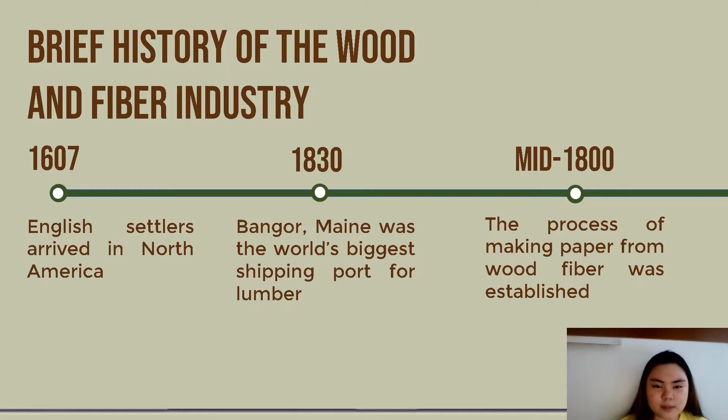In the mid-1800s, the process of making paper from wood fiber was established. Before then, paper was produced from rags and other materials. And since then, the wood industry only grew larger.

Nowadays, the industry makes up about 4% of the world's economy. Although it may seem to be a small number, it actually means that the industry is worth over $3 trillion worldwide, with the largest contributors being the United States, Mexico, Canada, China, and Brazil.

However, the industry also led to several crises. Although wooden fiber is considered a renewable source, it is important to be responsible when harvesting in order to minimize environmental impact. Currently, illegal logging is done all over the world. However, the most affected area is the Amazonian rainforest, where the total value of the illegally harvested wood is estimated to be around $100 billion per year.

With pollution and waste being larger issues, as the world population continues to grow, people have gone out of their way to make products that are biodegradable, and most of these products are created from wood. This is a counteraction to using plastic and metal products, which mostly take centuries to degrade naturally.

The industry intersects with many other critical industries such as logging, wood product manufacturing, and house construction. Currently, some of the biggest companies in the industry today are Weyerhaeuser, Masco, and Georgia Pacific, among numerous international companies within the industry. As one of the most well-known companies in the industry, Weyerhaeuser is a forestry and wood products manufacturing company that operates three major business segments: timberlands, wood products, and energy and natural resources.

As of 2021, Weyerhaeuser has a revenue of $7.2 billion and a net income of $582 million. They also use byproducts from their wood production to create biofuels such as wood pellets. And recently, they sold their container board packaging and recycling business to the International Paper Company for $6 billion.

Masco is a forestry, construction, and home improvement company which operates 59 production facilities in the United States and an additional 20 facilities across the globe. As of 2021, their revenue and net income have been reported to be $7.3 billion and $680 million respectively.

However, compared to other giants in the industry, a greater portion of Masco's revenue comes from its sales of consumer products rather than the raw material it generates from its land holdings such as timber and wood pulp. They also own Lifestyles Furnishing International, the third largest furniture manufacturer in the United States, as well as owning other large players in the industry such as Henredon, Drexel Heritage, and Maitland Smith.

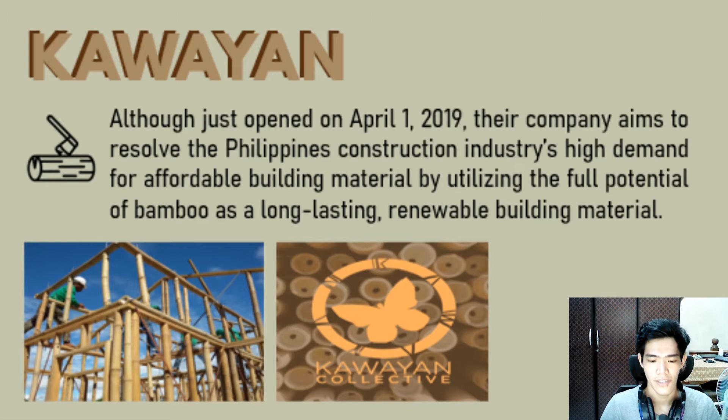For the Kawayan Collective, although they just opened in April 1, 2019, their company aims to resolve the Philippines' construction industry's high demand for affordable building material by utilizing the full potential of bamboo as a long-lasting and renewable building material. They organize the collection and treatment of bamboo poles for construction grade quality that rivals cement blocks, steel, and imported building materials to elevate bamboo as a sustainable, durable, and beautiful building material for a better home for all Filipinos.

Good day. Today I will be discussing the products for the wood and fiber industry. Firstly, for the fiber industry, this has been one of the most exported products in the Philippines, used not only to boost its economy but also to promote the agenda of using renewable products, that is, abaca fiber. This can be used to lessen the carbon footprint as a substitute for the coniferous pulp used in plastic or PVCs.

So there are different types of lumber, but for one example is the plastic lumber. This is used for parts of the house like the gardening side, for benches and other things, which is why it is popular because of its lightweight. The plastic lumber was just the tip of the iceberg as to how revolutionary construction products were created.

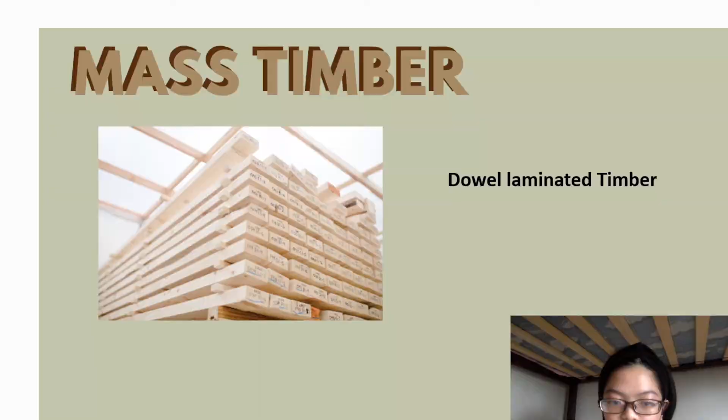And the processes: first, the selected trees in the area are visually inspected and marked as being ready to be cut down, or felled. Most tree felling is done with gasoline-powered chainsaws, and sometimes, if the terrain is relatively level, diesel-powered tractors called skidders are used. Then the trucks make their way down the graded road and onto public highways on their way to the lumber mill.

Next is the debarking and bucking, wherein logs are picked up from the log deck with rubber-tired loaders and placed on a chain conveyor that brings them into the mill. In some cases, the outer bark of the log is removed, either with sharp-toothed grinding wheels or with a jet of high-pressure water, while the log is slowly rotated about its long axis.

The logs are then carried into the mill on the chain conveyor, where they stop momentarily as a huge circular saw cuts them into predetermined lengths. This process is called bucking, and the saw is called the bucking saw.

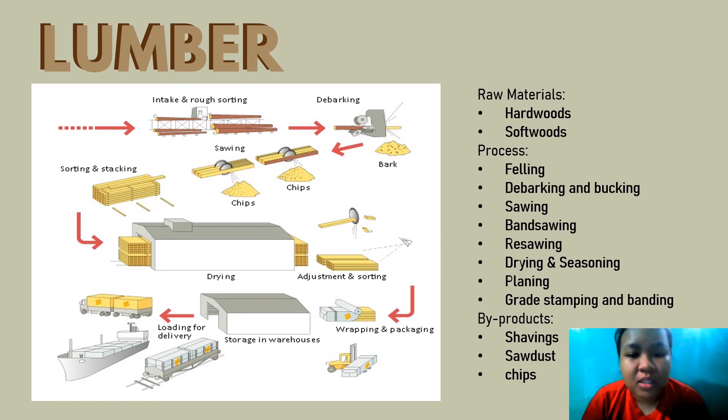The last main product is yarn, and the raw materials are cotton or natural fibers. In making yarns, about 15 different types of fibers are used. These fibers fall into two categories, natural and synthetic. Natural fibers are those obtained from a plant or an animal and are mainly used in weaving textiles.

The most abundant and commonly used plant fiber is cotton, gathered from the cotton boll or seed pod when it's mature. The processes involved are, first, preparing the fibers: fibers are shipped in bales which are opened by hand or machine. Next is the carding.

The carding machine is set with hundreds of fine wires that separate the fibers and pull them into a somewhat parallel form. A thin web of fiber is formed, and as it moves along, it passes through a funnel-shaped device that produces a rope-like strand of parallel fibers. Blending can take place by joining laps of different fibers.

The third step is the combing. When a smoother, finer yarn is required, fibers are subjected to a further paralleling method, and a comb-like device arranges the fibers into a parallel form with short fibers falling out of the strand.

Then drawing out. After carding or combing, the fiber mass is referred to as the sliver, and several slivers are combined before this process. A series of rollers rotating at different rates of speed elongate the sliver into a single, more uniform strand that is given a small amount of twist and fed into large cans.

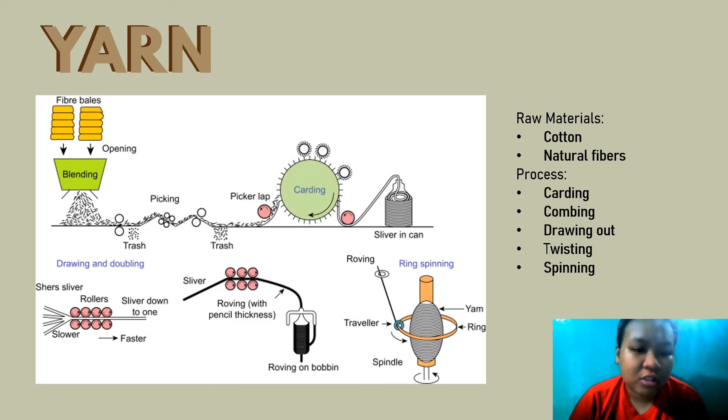The wood that is removed, felled, or harvested is called roundwood. The total industrial roundwood globally produced in 2019 amounted to 2,025,000,000 cubic meters.

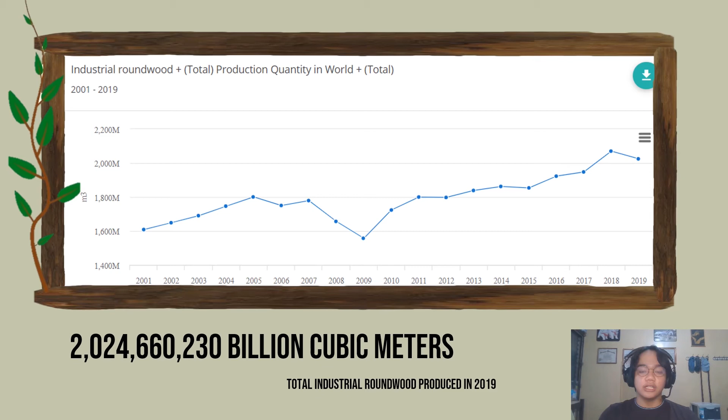This was the second highest production since the start of the 21st century, after reaching the highest total industrial roundwood production in 2018. For the global production of sawnwood in 2018, it totaled 493 million cubic meters, which was 2.2% higher than in 2017 and 13% higher than in 2014.

This trend is largely due to the increase in production in Europe, accounting for 35%, and Asia Pacific by 31%, from the global production of sawnwood.

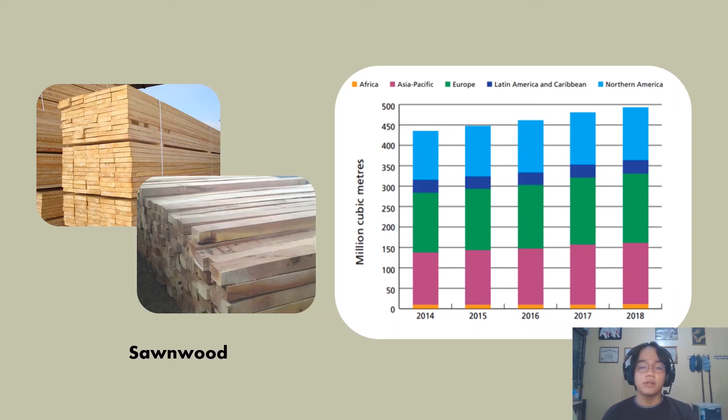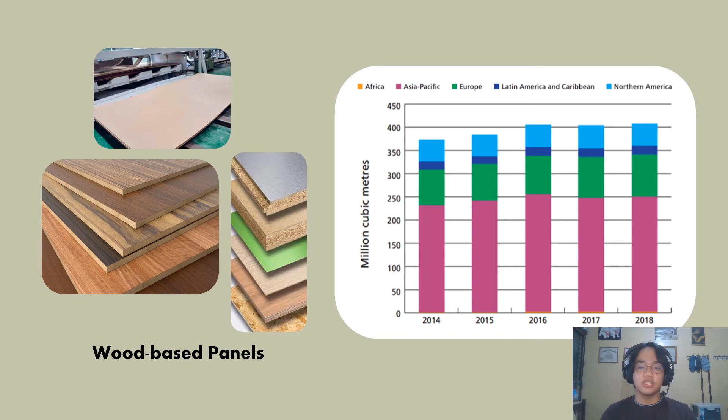In 2018, global wood-based panel production reached 408 million cubic meters. Wood-based panels was the product category that saw fast growth in production owing to rapid and consistent growth in the Asia-Pacific region until 2016. In later years, global production has stabilized, wherein the Asia-Pacific region accounted for 61% of global production in 2018.

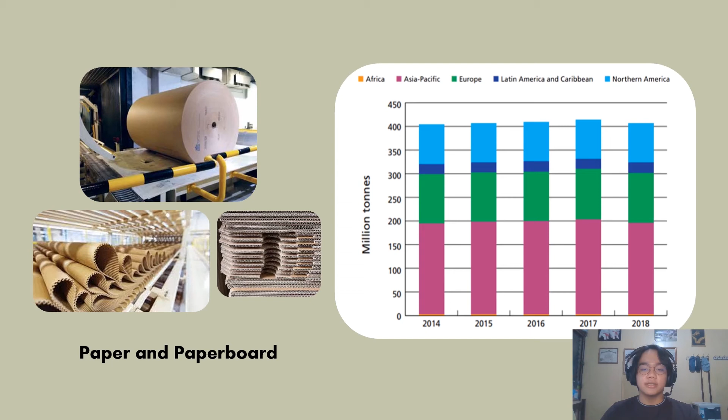Paper and paperboard production increased over the period from 404 million tons to 409 million tons. Almost all of these fluctuations were due to changes in the Asia-Pacific region, where production dropped by 3% in 2018. Europe and Latin America and the Caribbean saw an increase of 2% and 9%, while North America and Africa recorded a decline of 3% and 14% respectively.

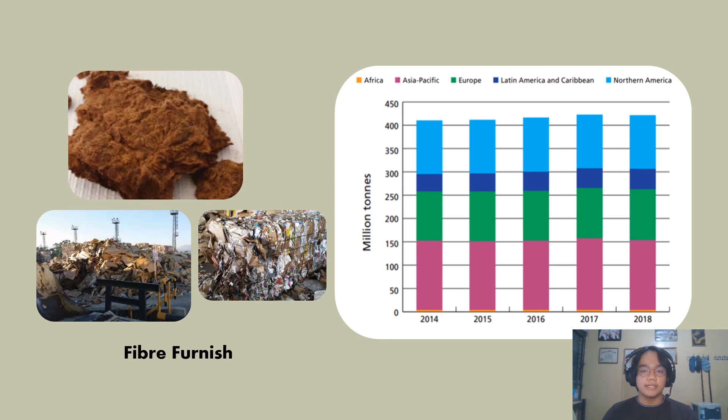Global production of fiber furnish in 2018 amounted to 421 million tons, which was only 2% above 2014. Production in the Asia-Pacific region, Europe, North America, and Africa remained roughly the same over the period from 2014 to 2018. In contrast, production in Latin America and the Caribbean grew consistently over the period, by 15% from 2014 to 2018, as new pulp mills came into operation in South America. The future of wood-based industries depends largely on the success of industrial tree plantations.

Industrial timber production in the Philippines has been stagnantly increasing but also fluctuating over time. In 2019, the Philippines was recorded to produce 3.98 million cubic meters, wherein the Caraga region is considered the leading producer of timber in the country, covering 684,000 hectares of forest lands in Agusan del Sur, Agusan del Norte, Surigao del Sur, and Surigao del Norte.

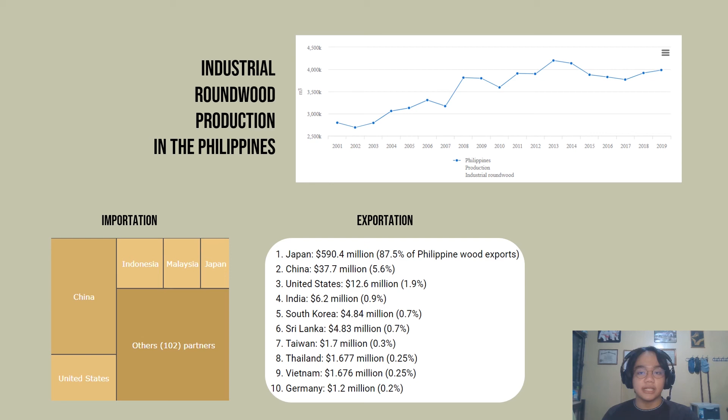Out of this national demand for wood, only 25% comes from local sources, while 75% are imported. In 2015, the Philippines imported wood from top partner countries such as China, United States, Indonesia, Malaysia, and Japan. For Philippine exportation, Japanese importers paid the highest amount for timber and related wood items exported from the Philippines in 2018. Together with 9 other countries, the top 10 international buyers accounted for 98.2% of overall wood shipped from the Philippines.

In addition, Mr. Pantaleon said he's going to discuss the top producing countries in the wood and fiber industry. These data shown are from the Food and Agriculture Organization of the United Nations in 2018.